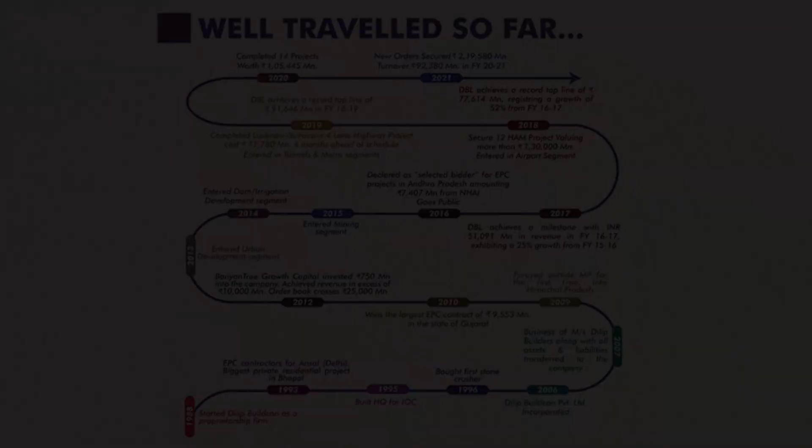We started the journey in 1988 and travelled so far with the annual turnover in 2021 of 92,380 million, along with new orders of 2,19,580 million.

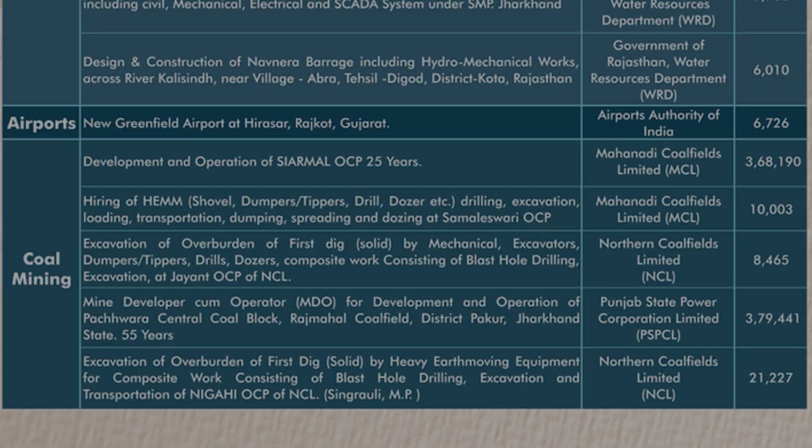Coal mining details. Dilip Buildcon has got a contract from Coal India owned Mahanadi Coalfields Limited for a mine developer cum operator contract for the development and operation of the huge Siarmal open cast project. The Siarmal open cast project is located in the northwestern central part of IB Valley coalfields of Odisha, known as Gopalpur sector, and falls mainly in Sundargarh district of Odisha.

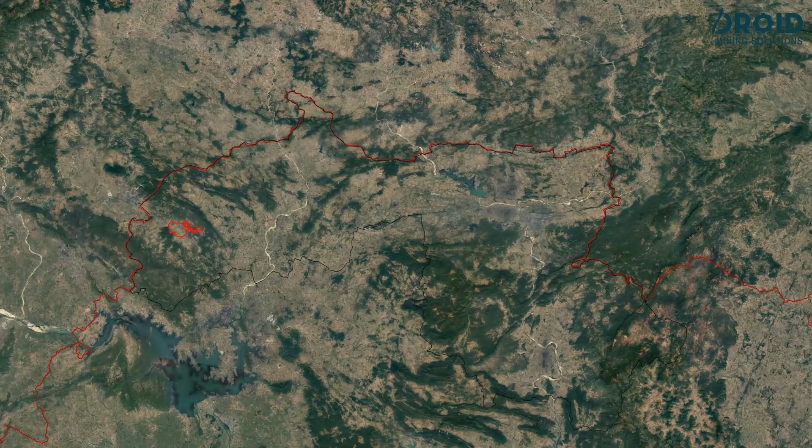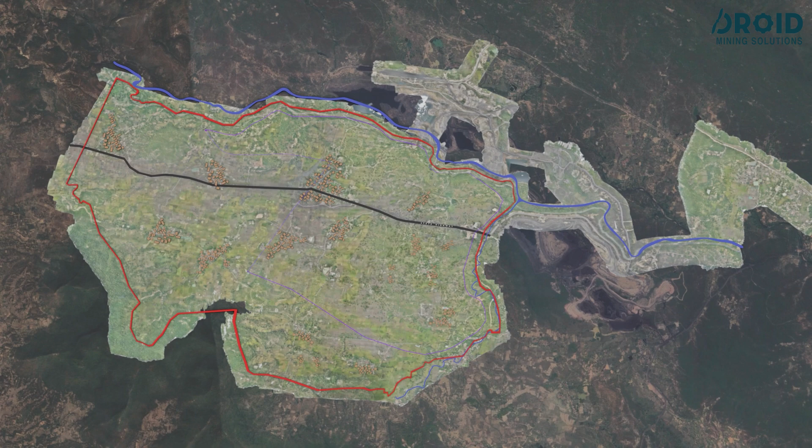The contract value is Indian rupees 36,819.07 crores and the contract period is 25 years. Mine lease for life of the mine. Mine ultimate pit limit. Mine working boundary for 25 years as provided to Dilip Buildcon, Siarmal Coal Mines Private Limited.

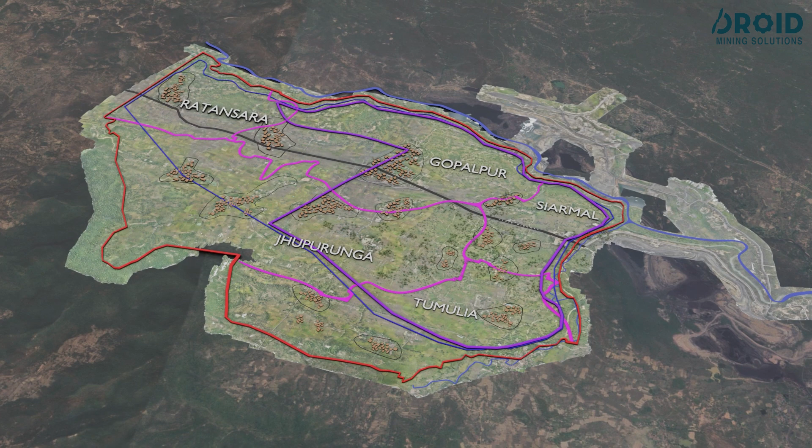The area consists of 5 villages, namely Siarmal, Jhupurunga, Tumulia, Ratansara and Gopalpur. Sundargarh-Raigarh Interstate Highway passing adjacent to the OCP.

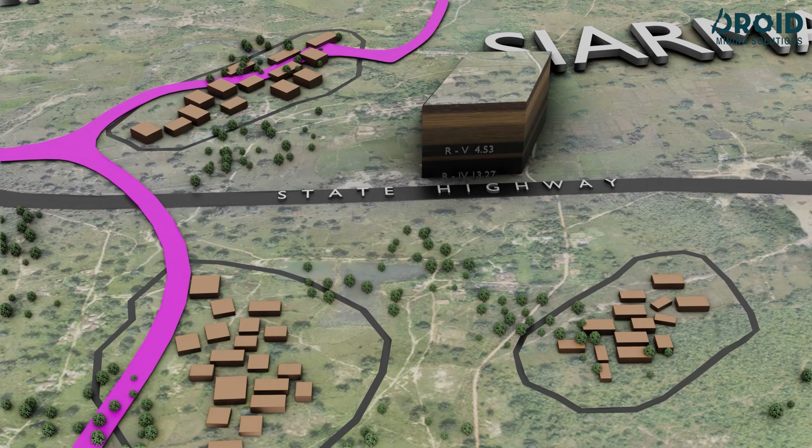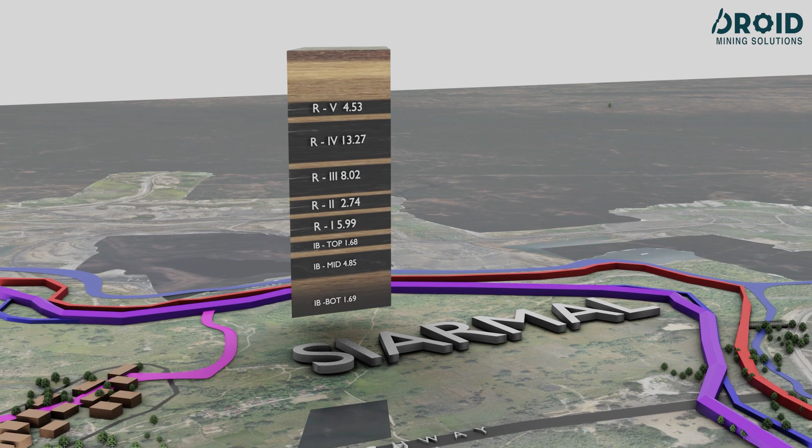In Siarmal and Siarmal Extension and Banapatra block, a total of 16 correlatable coal horizons seams have been identified. Among these seams, Rampur 1, 2, 3, 4, Lajkura 1, 2B, 2T1 and Lajkura 4 are the most potential thick coal horizons in this block.

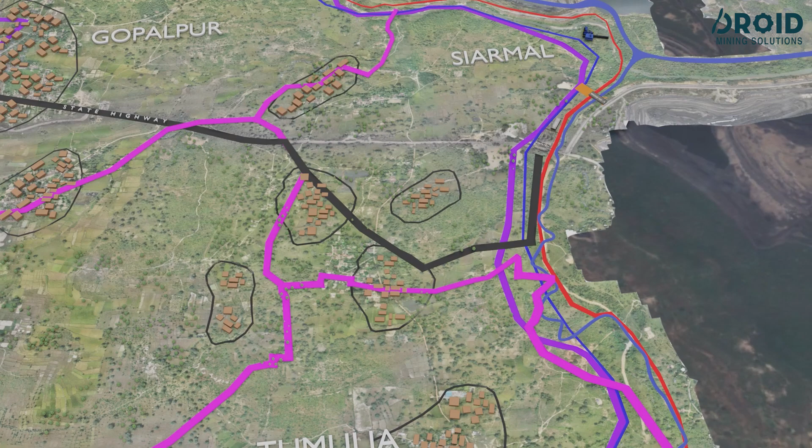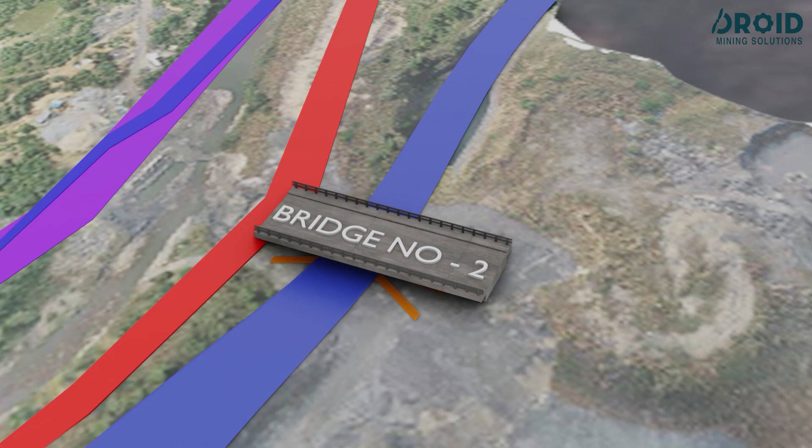Bridge number 2 is mainly meant for connecting Siarmal mines and Basundhara mines, and the bridge is over Basundhara river, used for transportation of overburden during initial years from Siarmal to the existing Basundhara decoaled area. Bridge number 4 is for the purpose of coal transportation, connecting Siarmal mines with the siding.

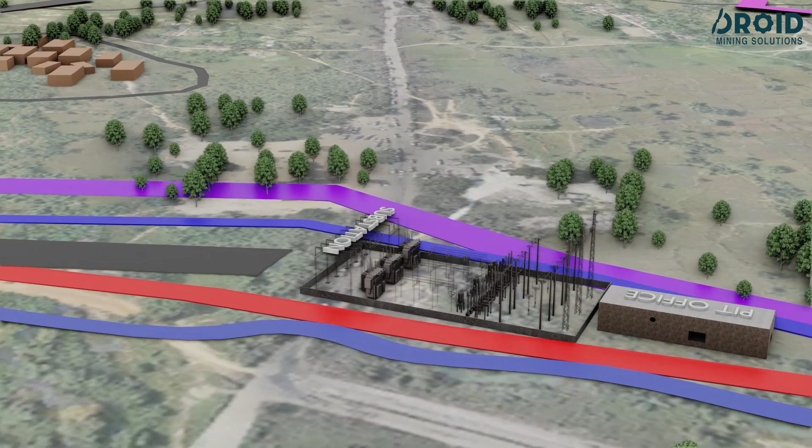The project will receive power initially by local grid and afterwards at 33 kV from the 33 kV overhead line coming from the 220 by 33 kV substation at Garjan Bahal. This is the pit office.

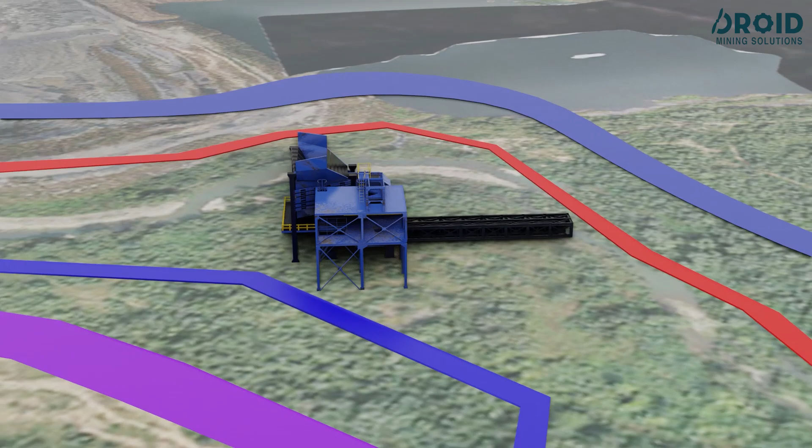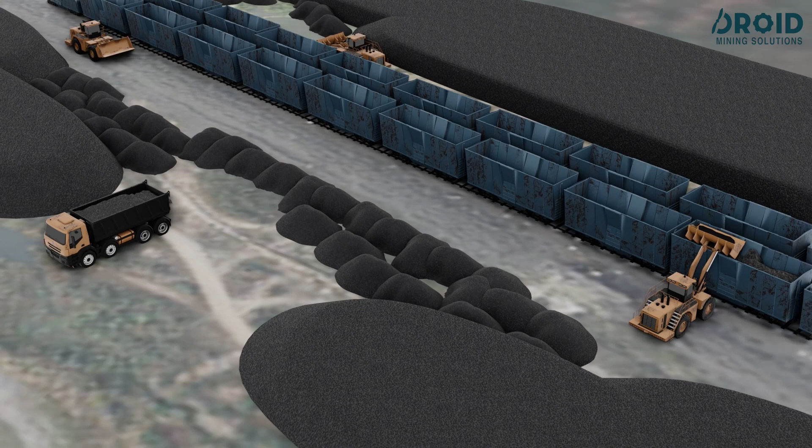Coal handling plant is needed for handling coal coming from mines, loading to trucks and dispatching to siding. The existing nearby siding is the Sardega siding, which is an operational coal siding having a capacity of 18 million tons, at present handling 12 million tons coal of adjacent mines of Kulda, Basundhara, Garjan Bahal.

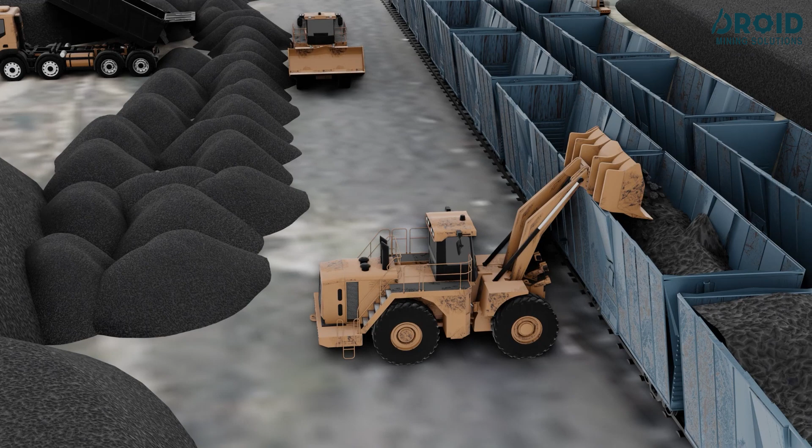By the introduction of rapid loading system, capacity of Sardega siding will be enhanced by 20 million tons. This will cater the requirement of Siarmal coal production in initial years.

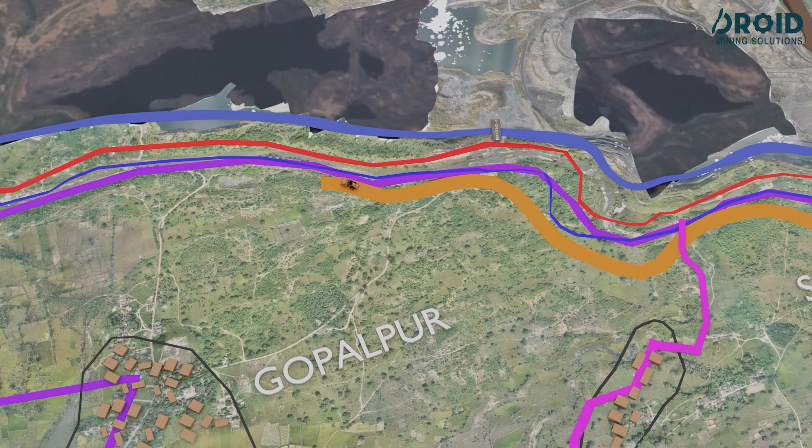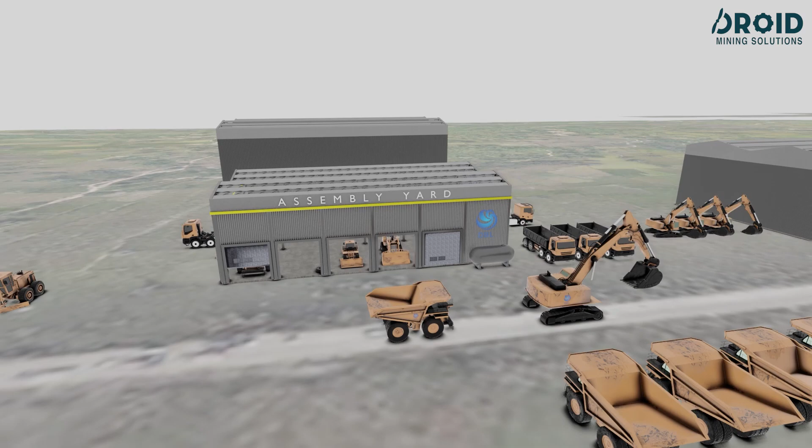Internal road connecting to the mine workshop and infrastructure so as to facilitate transport of material and equipment from and to mines, workshops and fuel stations. A state-of-the-art workshop is planned to cater the requirement of maintenance for 24 hours and 365 days of all miscellaneous and other equipment.

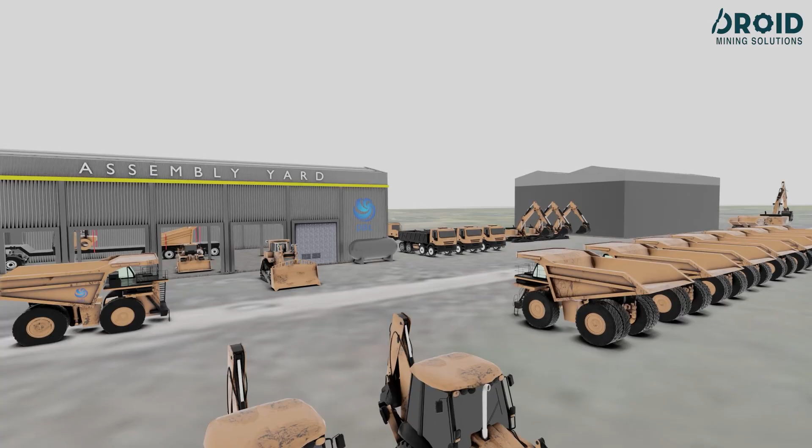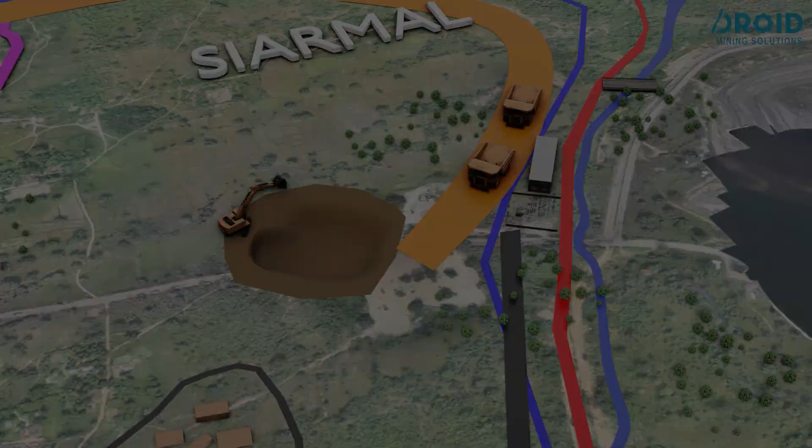All the machines, after maintenance and thorough checkup, go to the mines through the service road provided for the purpose. Initial mine opening will be near the outcrop of Lajkura 3 and 4 seam. So, box cut. An access trench will be started towards north of borehole number CMHG 179.

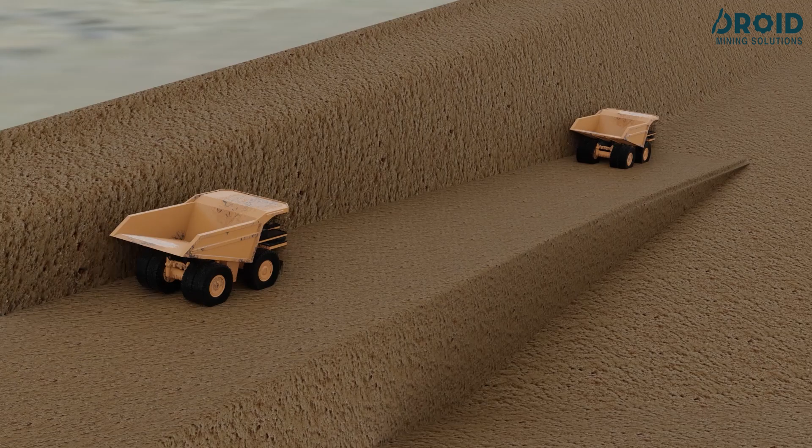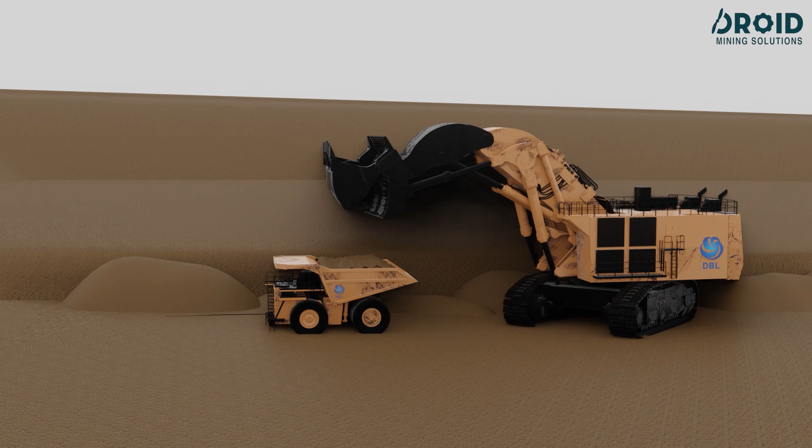This will be driven towards south to touch the floor of the above mentioned seam. Mine strike will initially be limited up to a width of 900 to 1000 meters towards west. Later, this access trench will be turned towards north to touch the floor of lower seams.

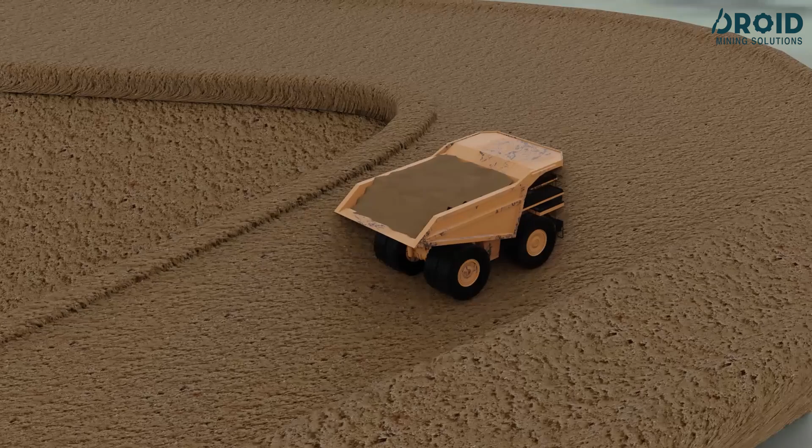The access trench has sufficient width to accommodate two-way transportation for bigger HEMM, and the mine will be operated with suitable bench height and width as per mine plan. The topsoil which will be taken out will be transported through haul dumpers, segregated and preserved at a designated place, and reused for restoration of mines.

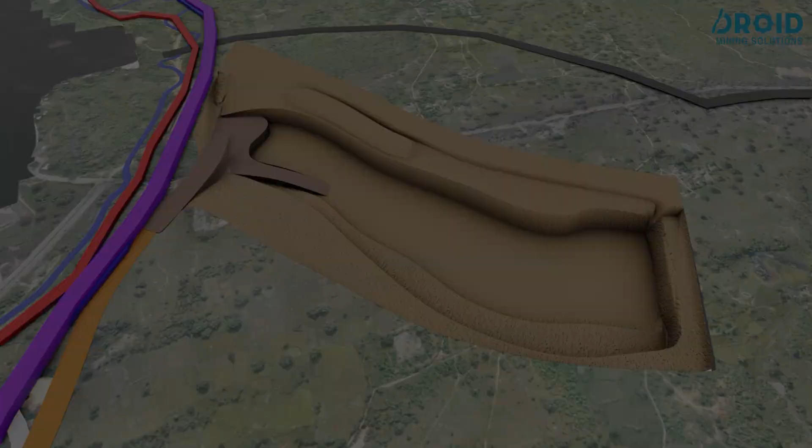After topsoil removal, the mine will encounter hard strata, for which drilling and blasting would be required. Drill size of 200 to 250 mm diameter with suitable explosive for blasting and loosening the material.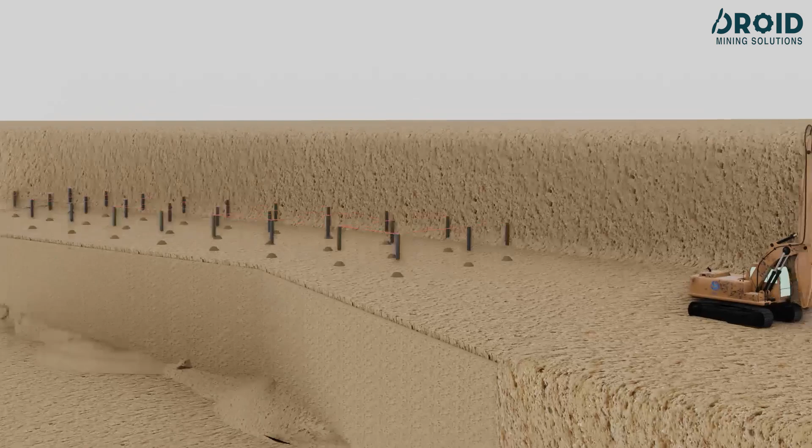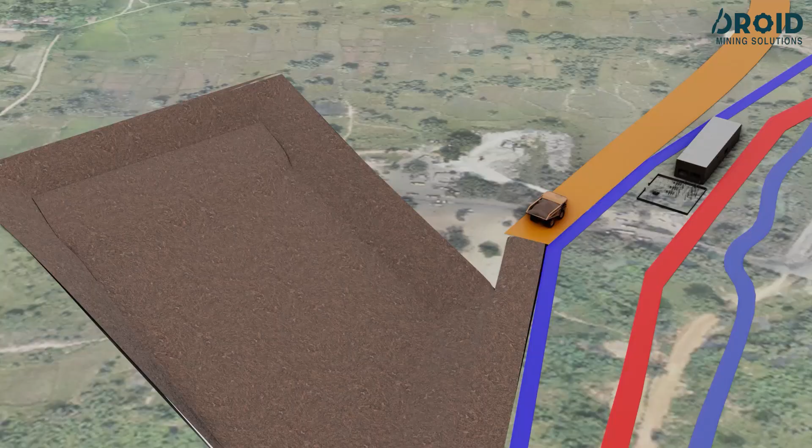After blasting, the excavator would be able to load the overburden into haul dumpers and transport it to designated overburden dumps. Suitable embankment is constructed along the Basundhara River 3 meter above high flood level, and the same embankment will be used for diversion of state highway. A road is to be constructed for the diversion of Sundargarh Raigarh along the Basundhara embankment.

Bridge number 2 is mainly meant for connecting Siarmal mines and Basundhara mines, and the bridge is over Basundhara River, used for transportation of overburden during initial years from Siarmal to existing Basundhara decoaled area. 77 million cubic meter overburden will be dumped into the already excavated decoaled area of Basundhara mine in 5 years.

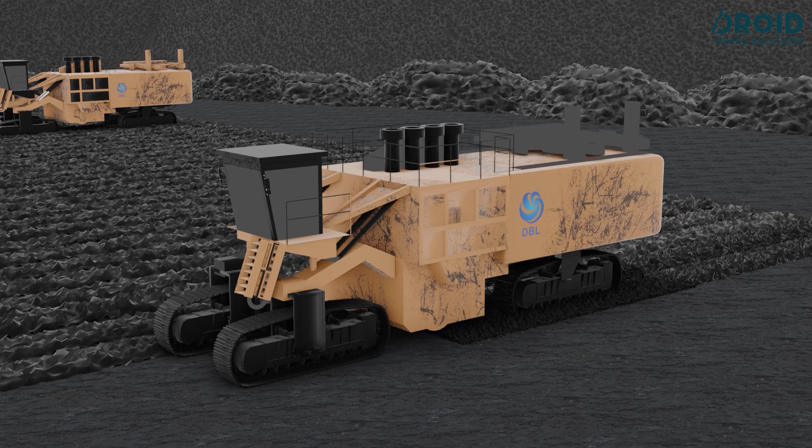In year 1, total 7.32 million cubic meter of overburden will be excavated and 5 million tons of coal is to be extracted. Coal mining will be carried out through blast-free technology, which is environmental friendly. Surface miner will be used for cutting coal of sizes less than 100 mm so as to avoid further crushing. Coal cut by the surface miner will be loaded by payloader into the dumpers and transported to surface coal dump yard.

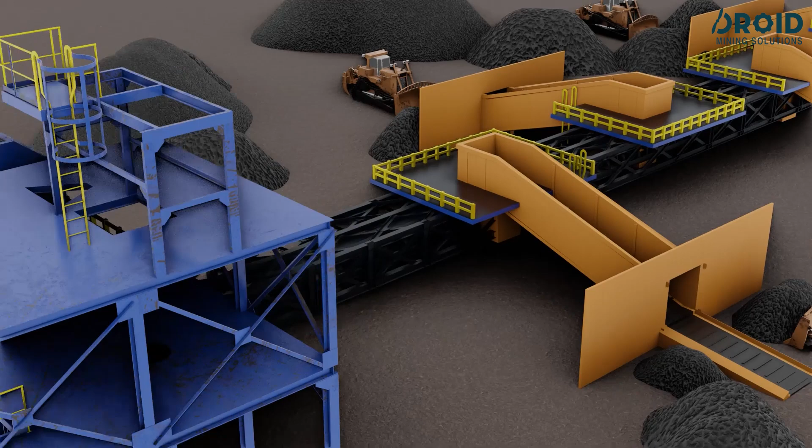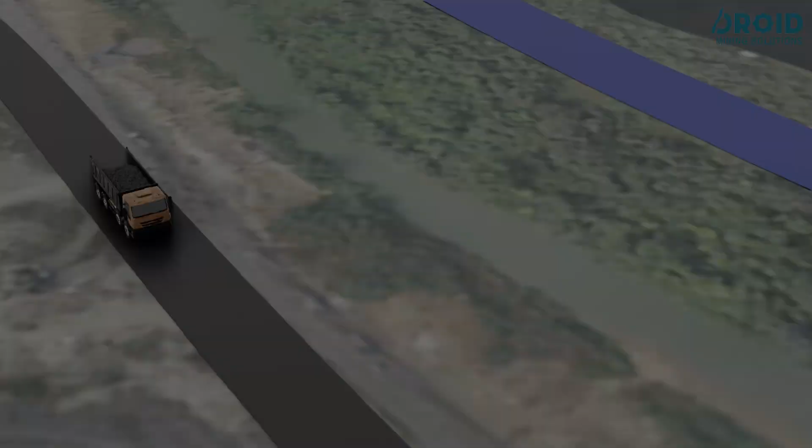Proper designed reclaim feeder will be provided to match the coal production with dispatch of coal by truck. Coal will be transported by tipper trucks via bridge number 4 to Sardega siding, which in turn will load the wagon for dispatch to final destination. Sufficient width will be provided and safety rules as per the modern traffic rules will be followed.

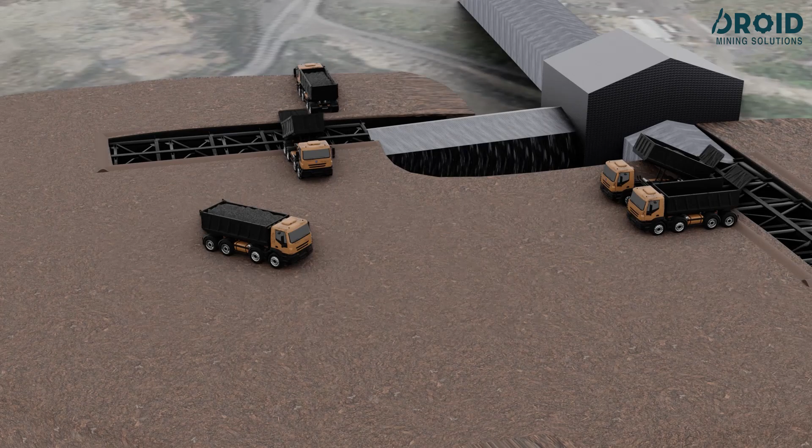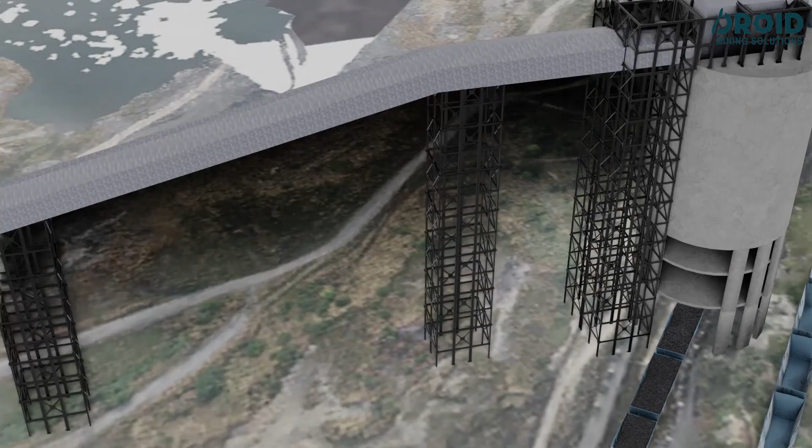Receiving hopper at rapid loading system is being designed so as to receive coal from 20 coal tippers at a time. Coal will be conveyed from bunker to silo through belt conveyor. Coal will be controlled through hydraulically operated chute loading onto box wagon.

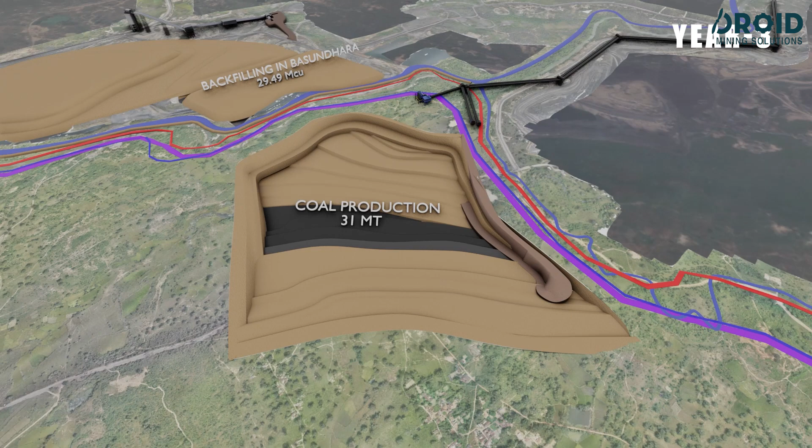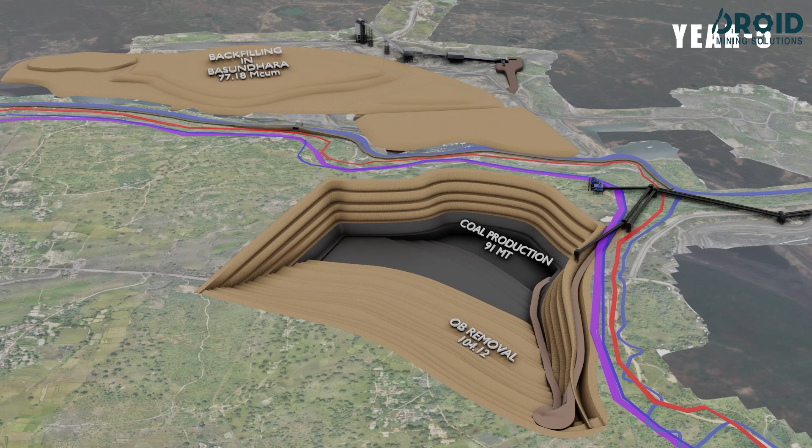In third year, total 31 million tons of coal will be extracted and 29.49 million cubic meter of overburden will be dumped into Basundhara decoaled area. By fifth year, temporary dumping will be started after filling of Basundhara decoaled area, which accounts to be 77.18 million cubic meters of overburden. Total 91 million tons of coal will be extracted by the end of fifth year.

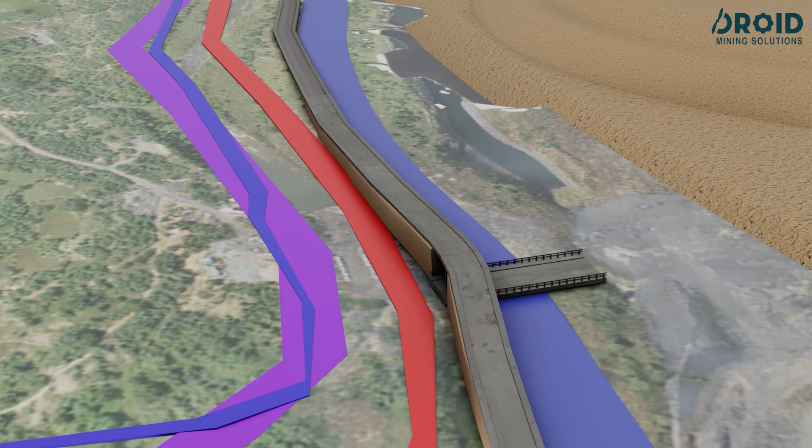The existing state highway from Sundargarh to Raigarh is diverted. The alignment of the proposed diversion will be initially along embankment of Basundhara river temporarily, and later it will be to the south of the proposed Siarmal OCP. After final diversion of the state highway, a flyover will be constructed to avoid any interference between highway traffic and mine traffic.

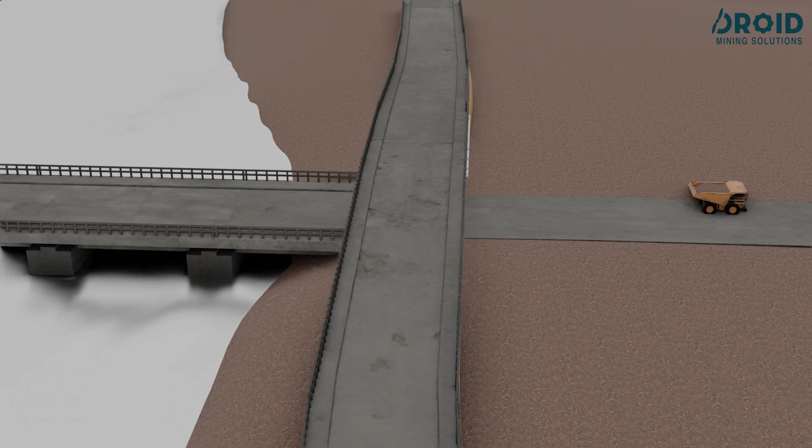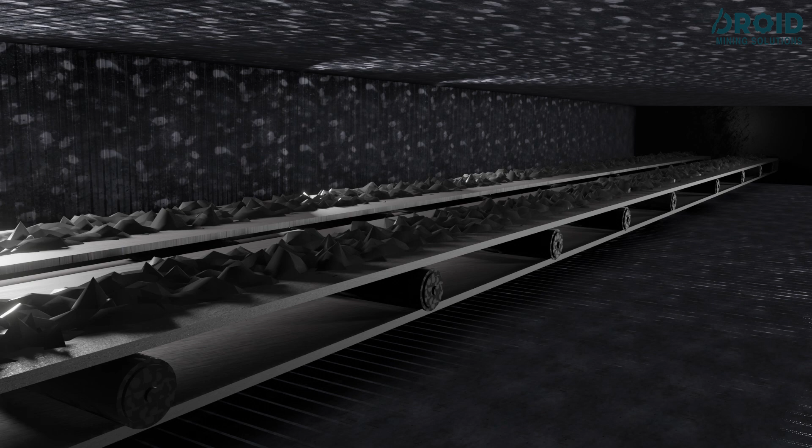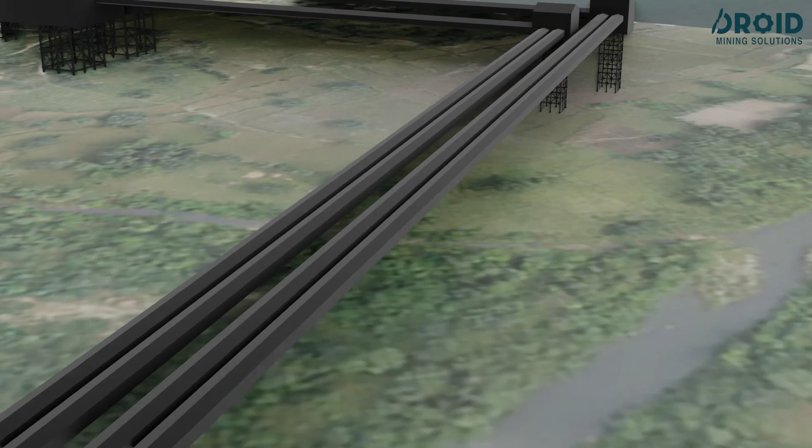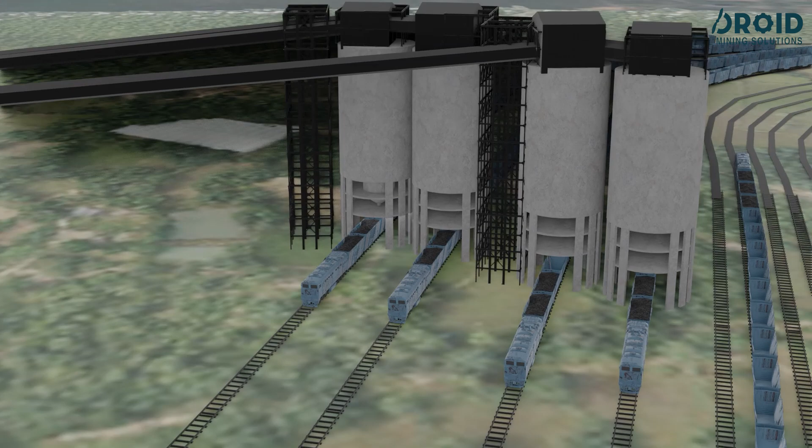At the end of fifth year, when the mine will be provisioned with coal conveying right from the pit bottom through CHP to Barpalli siding, 5.5 km length of belt conveyor will be constructed for connecting Barpalli siding. Barpalli siding will be provisioned with a bunkerage of capacity 40,000 tons. Barpalli loop is designed for receiving and loading 4 racks through 1,000 ton capacity 4 number silo pre-weigh hoppers.

By year 8, 182.07 million cubic meters of overburden will be dumped in temporary dumping area and 241 million tons of coal will be extracted from mining pit.

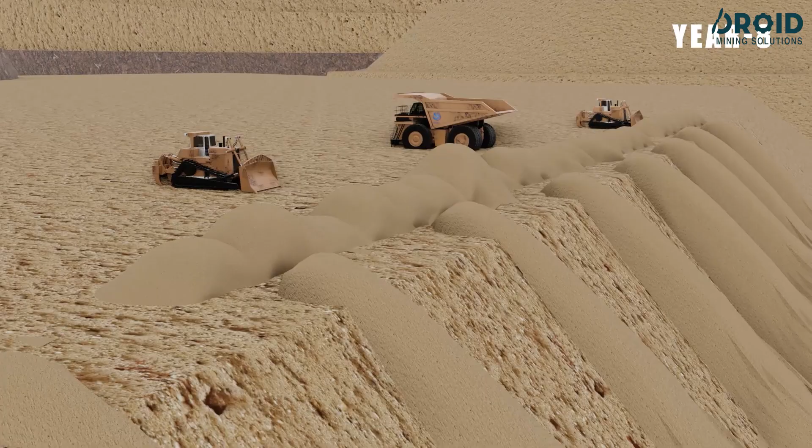Once the bottommost seam from the rise side is extracted, backfilling will be resumed and will follow the decoaled extracted area. After filling of Basundhara mines, this overburden will be sent to the designated dump number 1 and dump number 2 towards southeast and southwest of mine respectively, and backfilling in decoaled area will be continued as per the mining plan. Total 741 million tons of coal will be extracted till 18th year.

By the end of 25th year, coal production will reach 1091 million tons. In external dump 1 and 2, overburden will be dumped of size 89.25 million cubic meter and 93.96 million cubic meter.

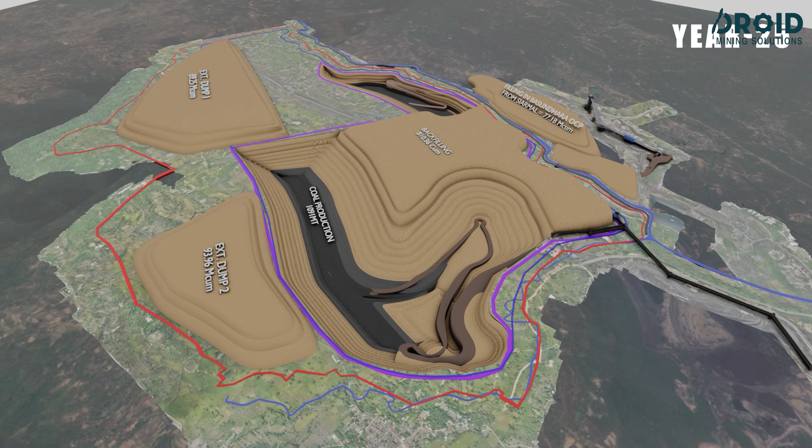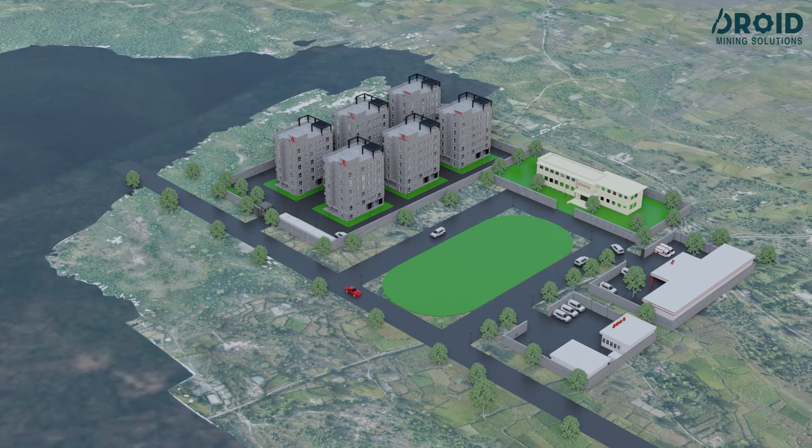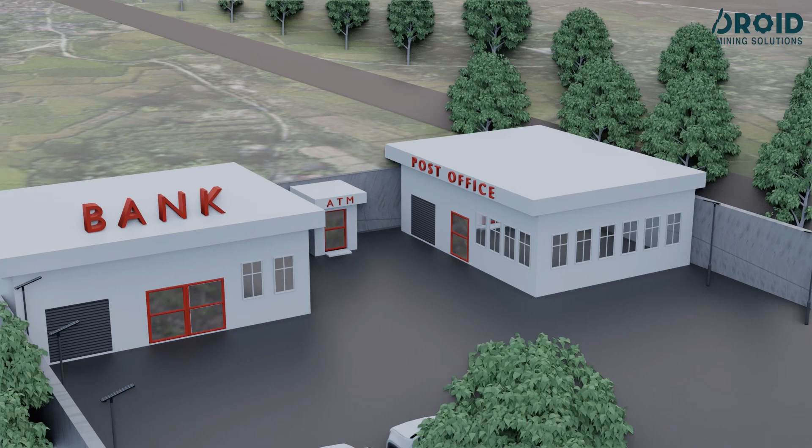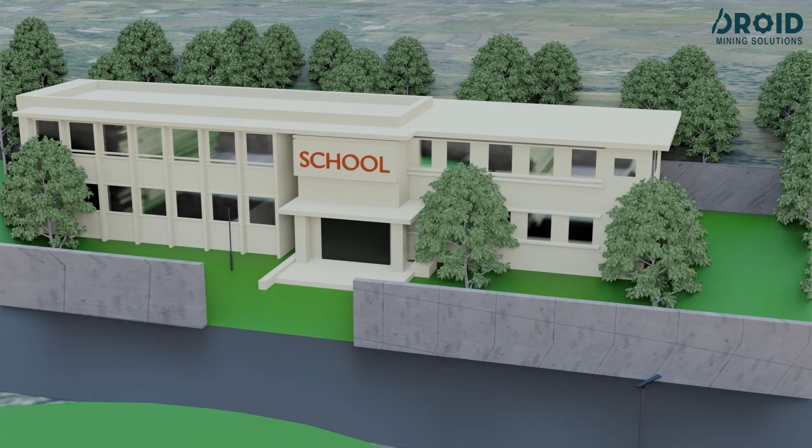A project colony having all modern amenities with capacity of 611 dwellings: A type 54 quarters, B type 522 quarters, C type 35 quarters and hostel type accommodation of 157 numbers, with full facilities such as ATM, bank, post office, community center, school to provide comfortable living of the employees. Till date, Siarmal Opencast with capacity of 50 million tons per annum will be the highest producing mine through MDO mode.